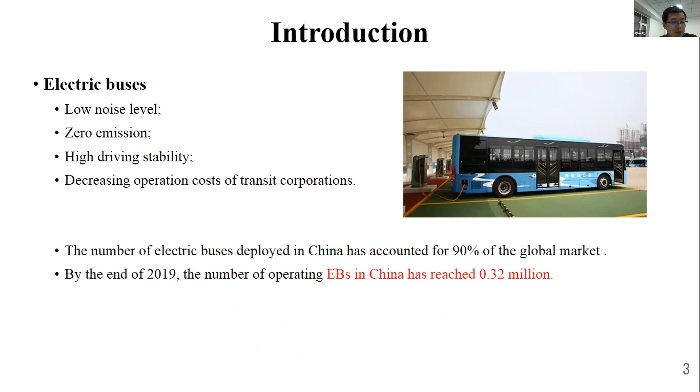Electrical buses have the advantages of low noise, high driving stability, and zero emission. It's of great significance to reduce the emissions of urban vehicle pollution. At present, the number of electric buses put into operation in China accounts for more than 90% of the world. However, due to the impact of onboard battery technology, electric buses still have short driving ranges.

Moreover, subject to the land use problem, no charging facility is equipped at the origin and the terminal stops for buses. Therefore, the buses have to get recharged at the depots when they finish the daily operation. Moreover, non-linear energy consumption exists. For example, with the decrease in SOC, the energy consumption will increase rapidly.

In such conditions, bus drivers generally have different degrees of anxiety. They worry that frequent use of the AC will accelerate the energy consumption and then lead to service interruption because of running out of electricity. Even if they know there will be a high SOC left at the end of the last trip, according to experience, they do not turn on the AC during the operation, or only turn on the AC in the last few trips. The anxiety has a greatly negative impact on the travel comfort of passengers.

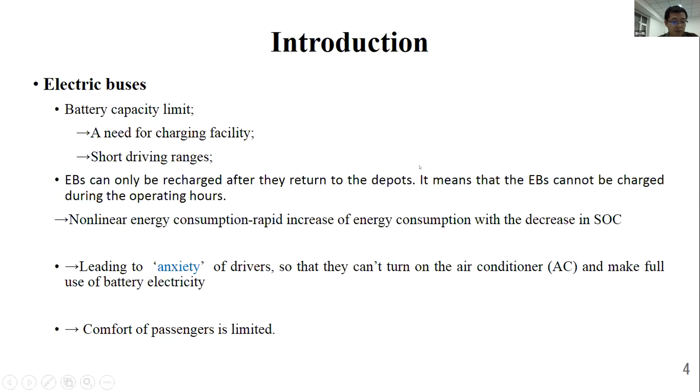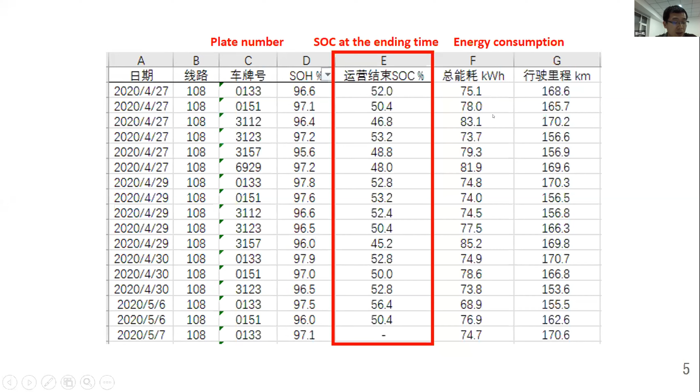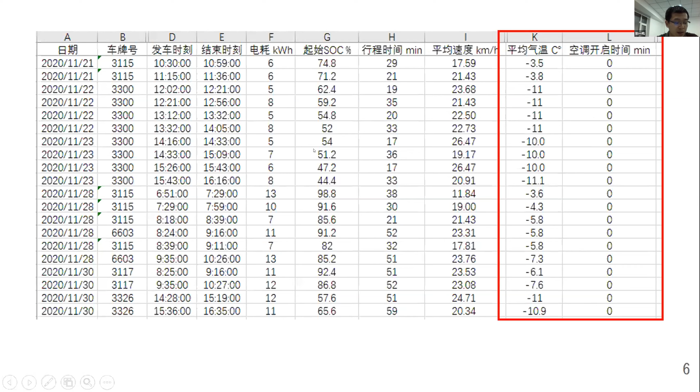This is the data for another bus route, 103, and these data were collected about 10 days ago. This is the temperature. The temperature is about -10 degrees centigrade, but the bus drivers didn't turn on the air conditioner. Therefore, it's necessary to consider the number of trips served by an electrical bus during the operating hours, the temperature and the travel time of each trip, and establish an optimization model for the AC usage.

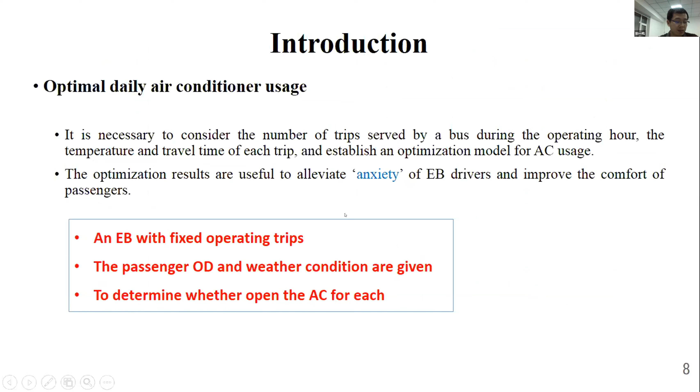The second part is the model development. We use N to denote the number of trips that a bus needs to operate. The trip time of trip n is Hn minutes, and it includes 2 phases. Phase 1 is the electric bus operating from the starting station to the terminal station. Phase 2 is the electric bus waiting for passengers at the terminal station. So the waiting time is Hn minus Tn. The operation from the depot to the original station is defined as trip 0, since it needs to consume a certain amount of electricity.

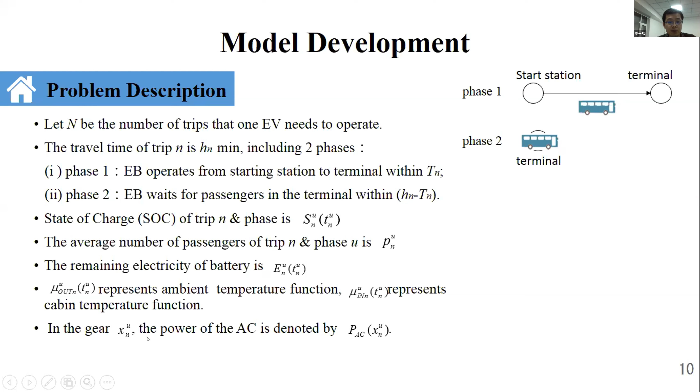The integer variable xn expresses different gears of the AC, and the power of the AC with gear xn is denoted by PAC. In our study, we need to maximize the value of the objective function and establish the following chance constraint programming model. Alpha and beta are predetermined confidence levels. F is the objective function and represents the total time for passengers to enjoy comfortable temperature on all trips. Maximum F will be the maximum value that the objective function achieves with at least probability alpha.

Lambda is a critical threshold which can ensure that the electrical bus has enough battery energy to return to the depot after the end of the last trip. In equation 3, PMV is an index to denote the comfort level. When it's larger than -1 and smaller than 1, the passenger will feel very comfortable.

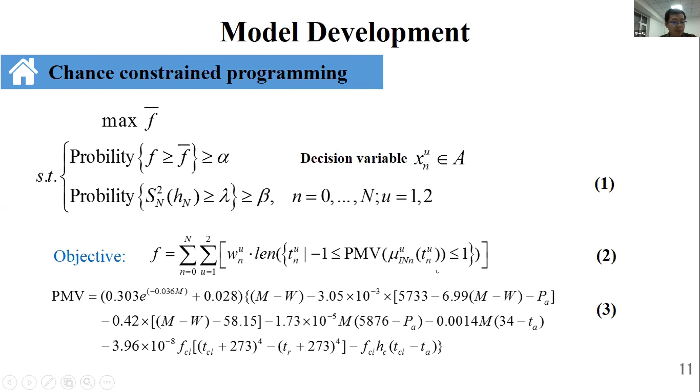And in this page, we need to calculate the cabin temperature. Cabin temperature is the most important part of this study. The cabin temperature will affect the comfortable level of passengers, and it's affected by five factors. For example, the number of passengers in the bus, the ambient temperature, and the area of the glass.

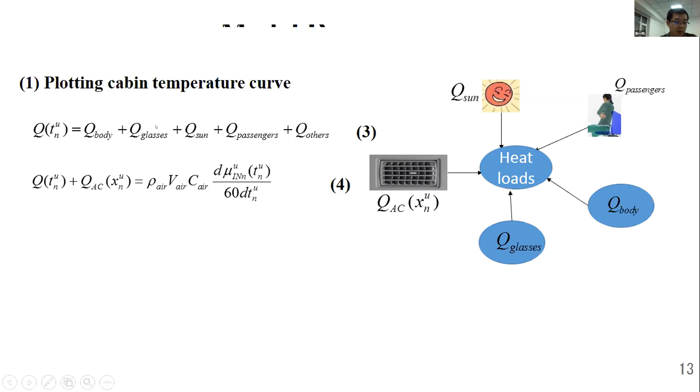The equation for cabin temperature is very complex, so it is not displayed here. Wn denotes the weighting factor, and the passengers' willingness to turn on the AC affects the weighting factor. It's directly proportional to the deviation of the ambient temperature from the comfortable temperature. As the ambient temperature changes slowly, the average ambient temperature of trip n is used to calculate the weight Wn.

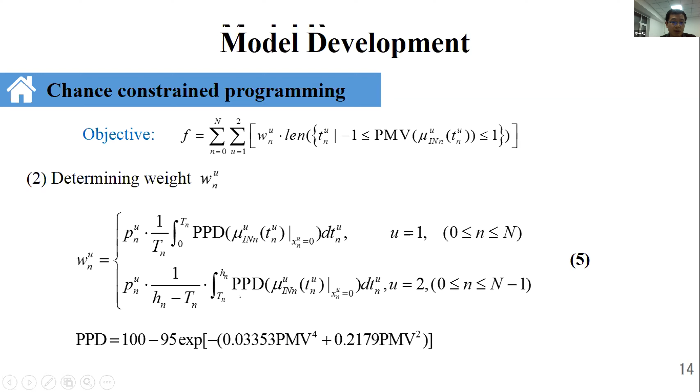Here we can see that PPD can be calculated based on PMV, and PPD is also used to calculate the weighting factor. The energy consumption model is fitted based on the field data in Meihekou City, China. It's mainly affected by trip time, temperature, the initial SOC and the AC usage.

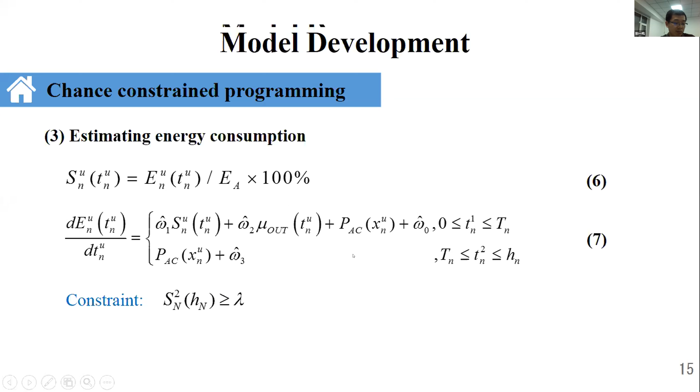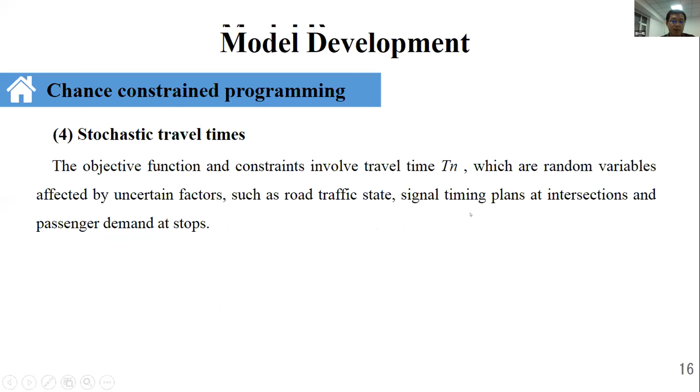The objective function and constraints of the model involve travel time Tn, which is a random variable affected by uncertain factors such as the road traffic state, signal timing plans at intersections, and passenger demand at stops. The traditional way to solve the chance constraint programming model is to transform it into its equivalent form. However, for this problem, it's hard to transform. Therefore, we use random simulation and the genetic algorithm to solve the proposed model.

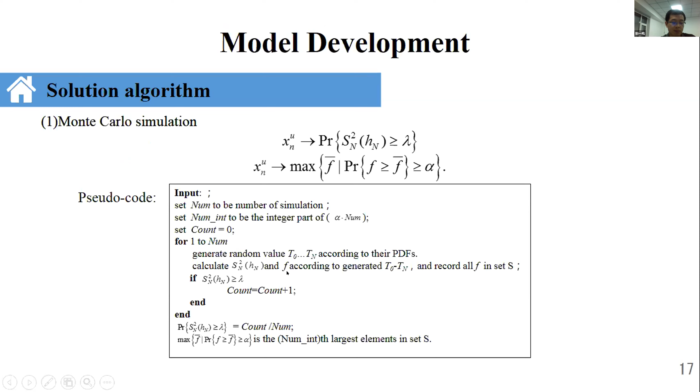Random simulation samples random variables based on probability distributions. In this paper, random simulation is used to calculate the probability measures. And the genetic algorithm is a method to find the optimal solution by simulating the natural evolution process, and is used to get the solution.

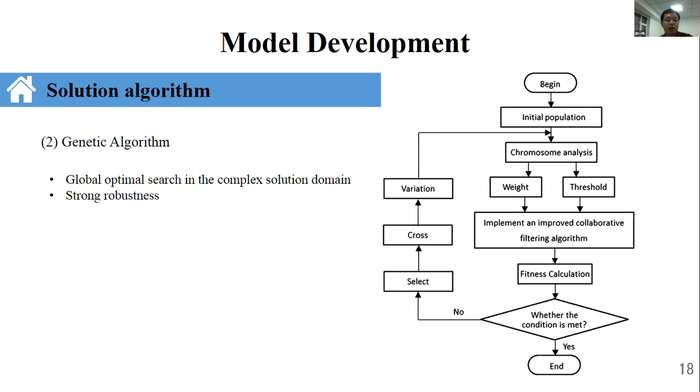Section 3 is the case study. In this section, electric bus route 108 in Meihekou City, Jilin Province, China, is taken as an example to validate the proposed method. The length of this bus route is 17 kilometers with 30 bus stops. The electric bus operates 10 trips one day. And here we display 11 trips, and trip 0 denotes it departs from the depot to the original station of trip 1.

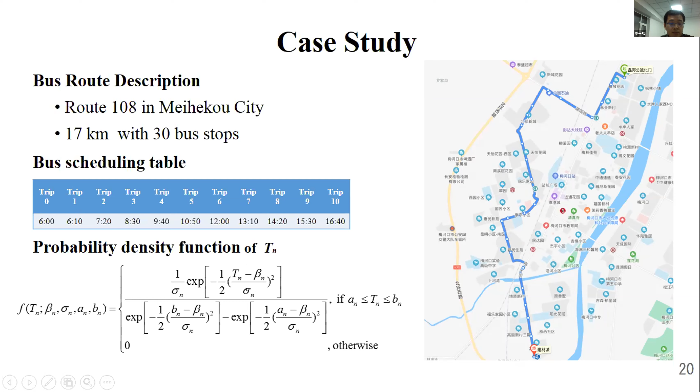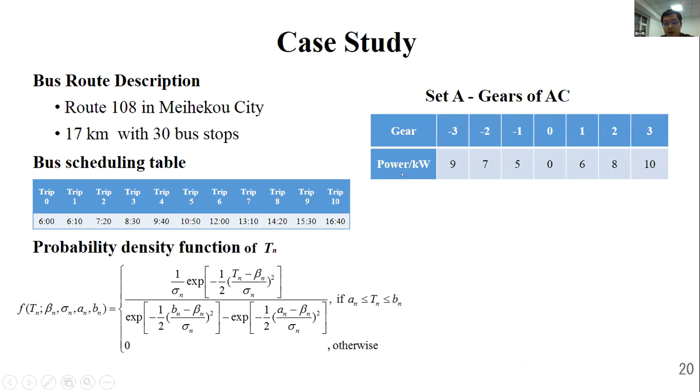And here is the scheduling table of the bus we choose. For the electric bus, we made data analysis and used the KS test to find that the travel time Tn follows a truncated normal distribution with different parameters. Here is the probability density function. And there are seven gears of the AC, and here is the power of each gear.

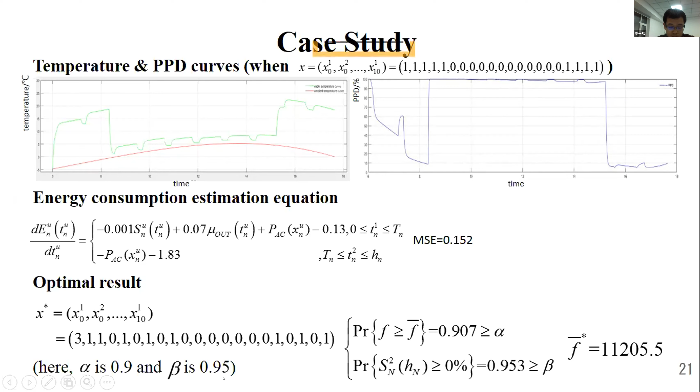The most important part of this study is to calculate the cabin temperature with the impacts of number of passengers, AC power, the ambient temperature, and the bus body structure.